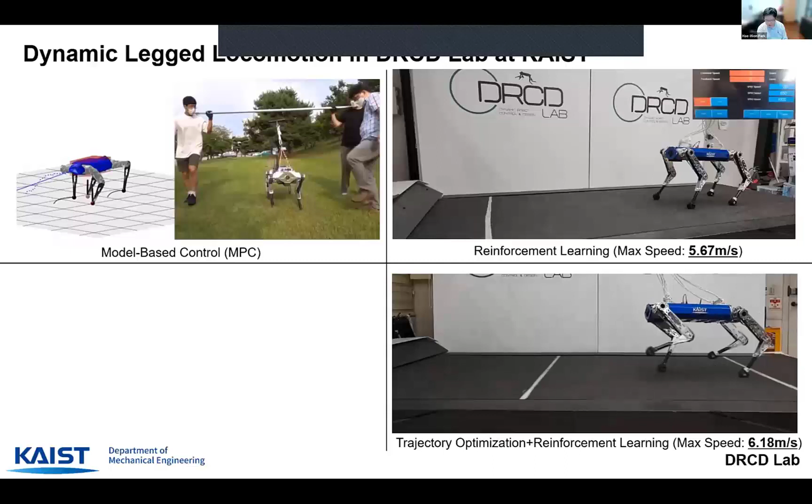In today's talk, I will mainly talk about control design for these two robots. The first one is KAIST HOUND - this is the same robot as you can see in the previous videos. On the right, we have MARVEL, an agile climbing legged robot.

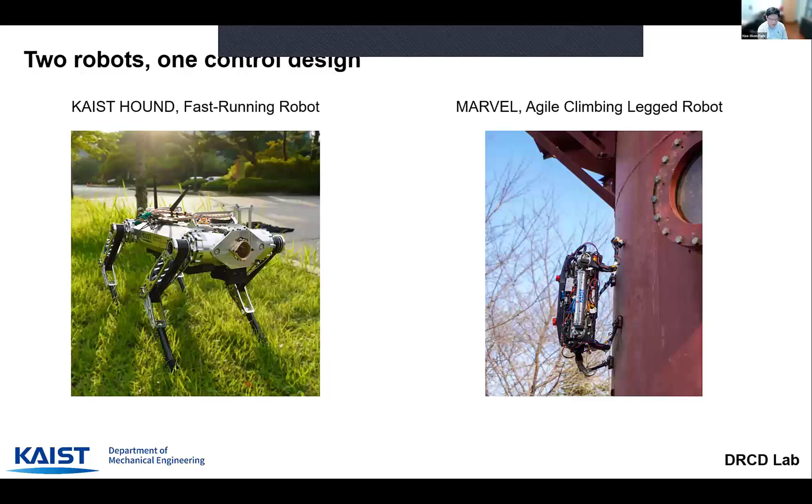KAIST HOUND is designed in-house, and it has a customized multi-module design. It is 45 kilograms heavy, and its leg length is 68 centimeters. So this is quite a large robot, about the same size as Boston Dynamics' Spot.

The second robot is MARVEL. This is actually a climbing robot, so it is only 8 kilograms heavy. It's actually designed by Yannan.

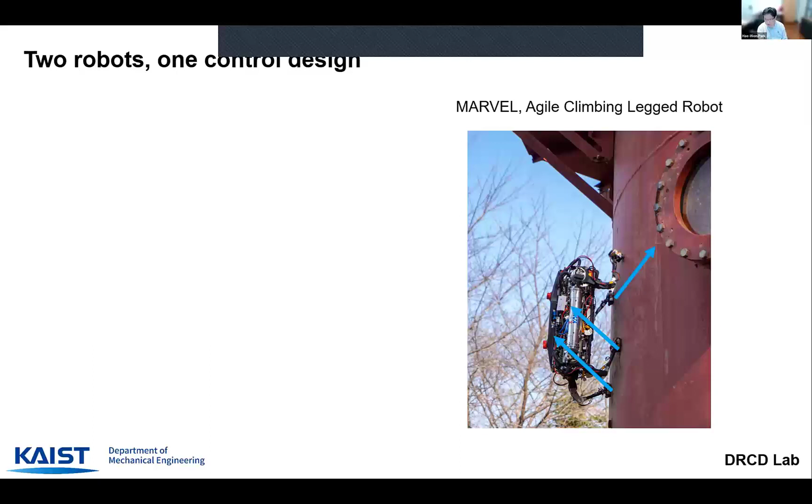In order to climb the vertical wall, it uses a magnetic foot. This magnetic foot can provide adhesion force to the ferromagnetic surface. It provides 530 Newtons in the normal direction, and in the shear direction it can provide 430 Newtons. This magnetic foot is designed by Yongwon and Jae-Jung Park, who are my students.

This magnetic foot utilizes the electropermanent magnet, and this electropermanent magnet can turn the magnetic force on and off like this. But unlike an electromagnet, it does not need any electrical energy to stay in the on state of the magnet - instead it requires electrical energy only when switching the on and off state. And the on and off switching occurs within 5 milliseconds, which is pretty fast.

So this magnetic foot is designed for fast locomotion on vertical walls and inverted walls. These two robots have different purposes - the KAIST HOUND is designed for running on the ground, while the MARVEL is designed for climbing vertical surfaces at very fast speed. But it shares the same simplified single rigid body dynamics model with different inertial parameters.

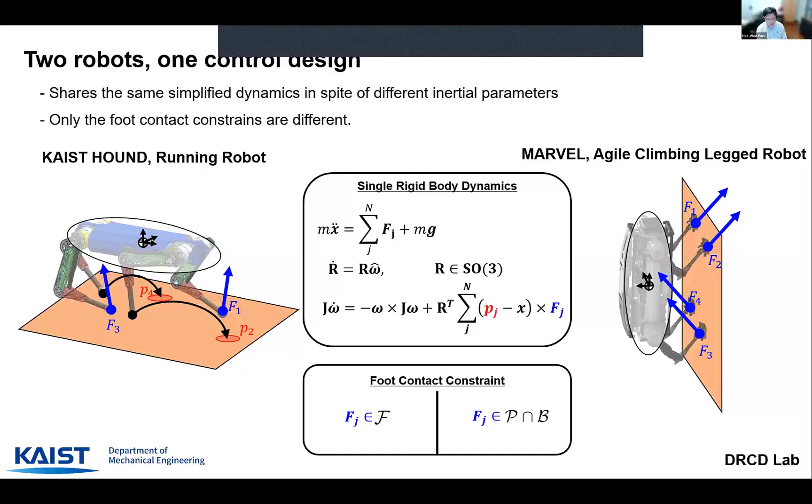The only change we should make is actually the foot contact constraint. So KAIST HOUND has to respect the friction cone foot contact constraint, while the MARVEL should respect some foot constraint imposed by the magnetic foot. Because these two robots share the same simplified model, probably the model predictive controller would be a good choice for designing the controller for these robots.

So in this single rigid body dynamics model, we have a rotation matrix, which is in the SO3 manifold. Normally this SO3 manifold is represented by Euler angles, and MPC is designed utilizing Euler angles. But as you know, this Euler angle representation has a significant issue when it comes to singular positions, and you can see that gimbal lock happens at singular positions.

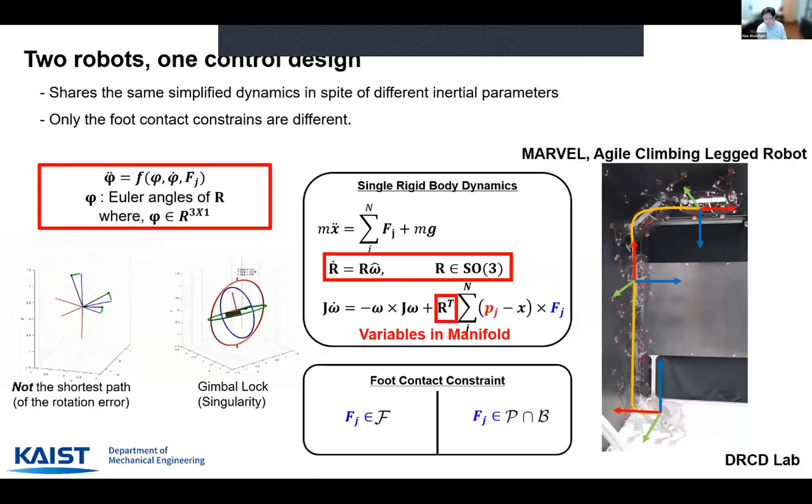In a normal quadruped robot, this would not be an issue, but this robot has to climb vertically and work on the ceiling in inverted configuration. So it can easily pass through singular configurations during locomotion, meaning we have to take the rotation matrix into account very carefully.

So we formulated our nonlinear MPC as an optimization problem on SO3. This is the error term, and this is the force constraint, where the state variables are as follows, including the rotation matrix.

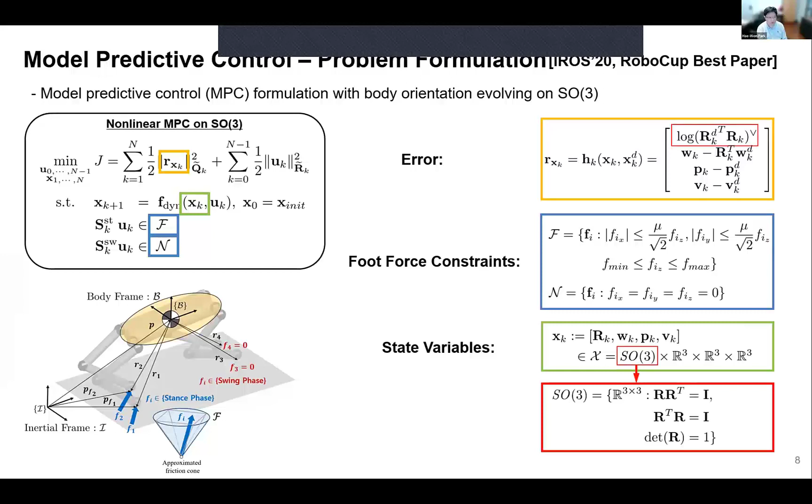This optimization problem is solved with an SQP solver, utilizing our own QP solver. And this is the whole control architecture.

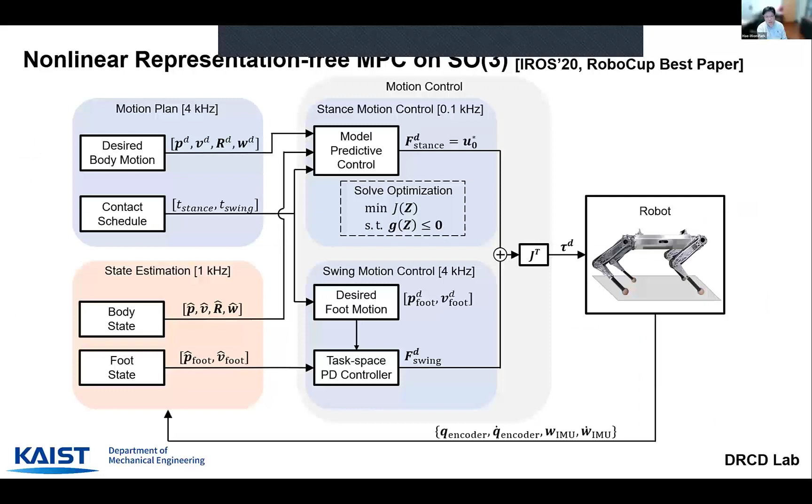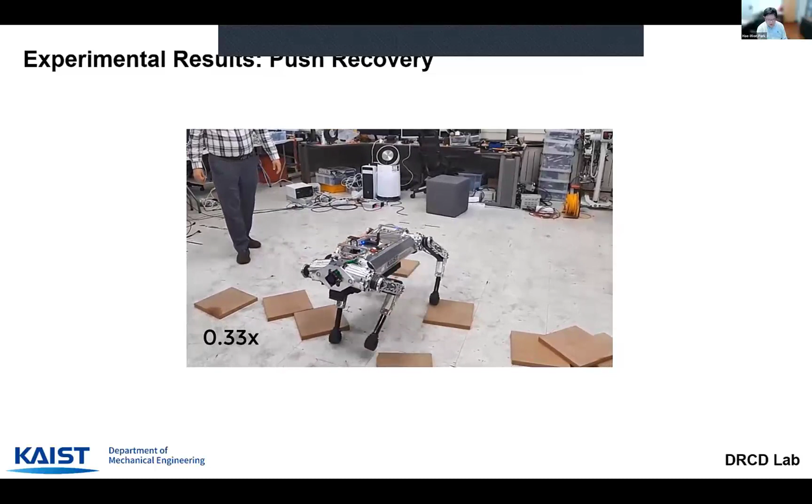If you see the robot recovering from the push, it actually can slide on the very slippery wooden block.

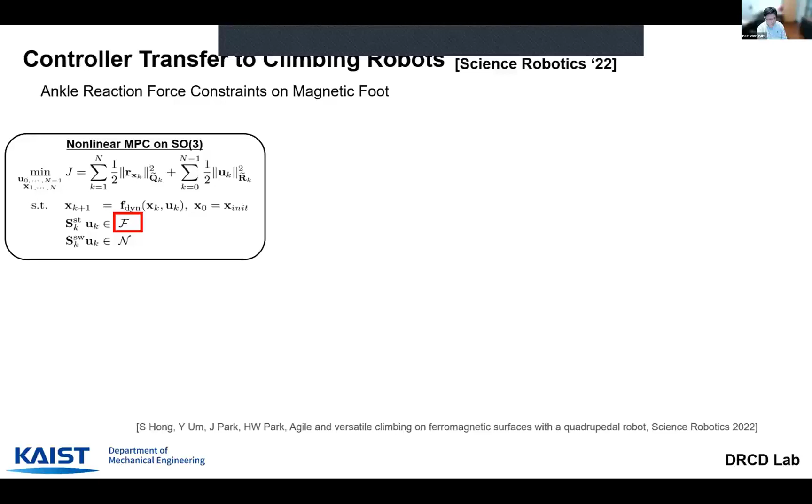Now that we've designed the MPC for the quadruped robot, we can transfer this to design a climbing robot controller. This can be done easily by changing only the foot contact constraint to account for the magnetic foot. So we have conditions for preventing sliding and preventing peel-off, and the foot contact constraint becomes the intersection of those two constraints.

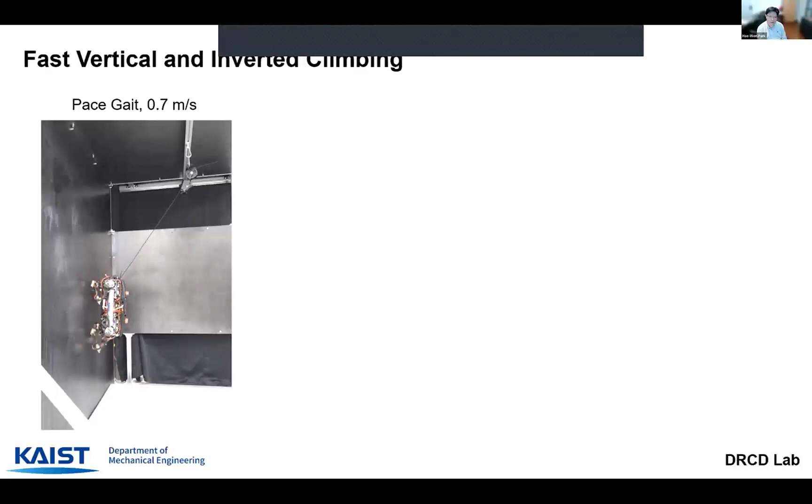This is the actual MPC experimental result. Here is a pacing gait with a speed of 0.7 meters per second, climbing a vertical wall. And this is an inverted trot gait on the ceiling at 0.5 meters per second.

This robot can carry a 2 kilogram payload vertically, and on the ceiling it can carry up to a 3 kilogram payload in inverted configuration.

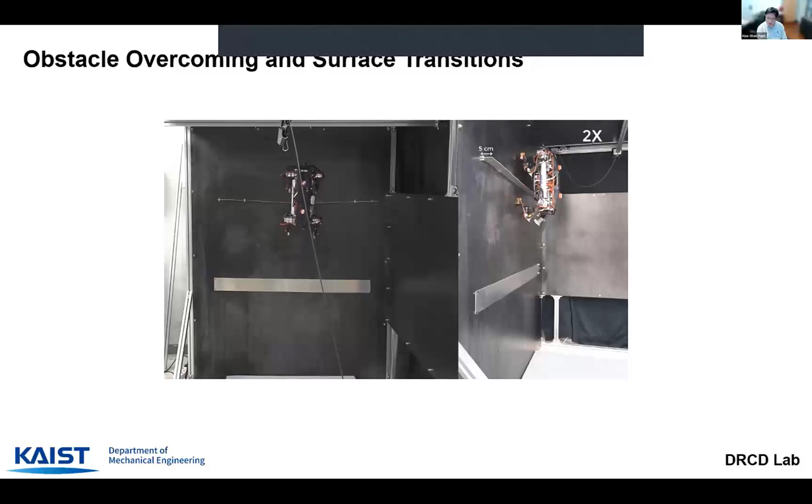Because this robot is a quadruped with many degrees of freedom, we can design trajectories that overcome obstacles. This video shows the robot overcoming a 10 centimeter gap and then a 5 centimeter high obstacle.

It can also switch and make a transition between different surfaces.

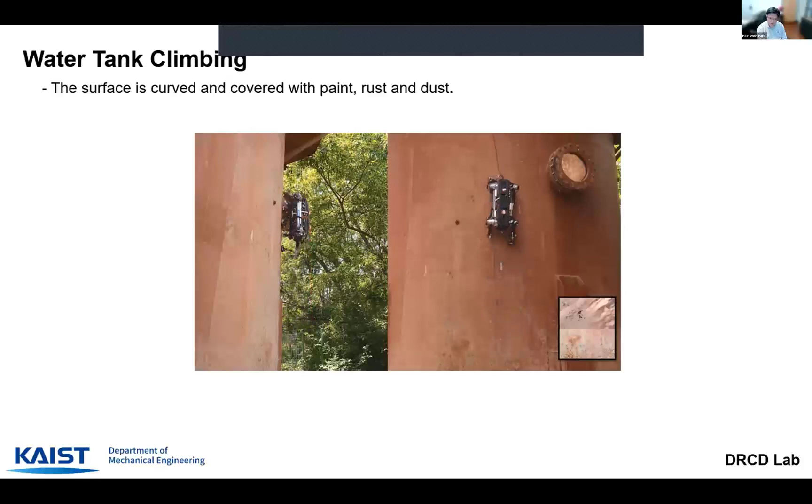We also did some outdoor experiments on a water tank. As you can see, even though the water tank is covered with rust and dust, the robot can climb up the vertical wall at quite a fast speed.

Even though we designed MPC controllers for these two robots, we experienced a very catastrophic failure during the treadmill fast run experiment. In this experiment, you can see that at high speed, the robot steps onto the side rail, which is not moving, and the robot stumbles over.

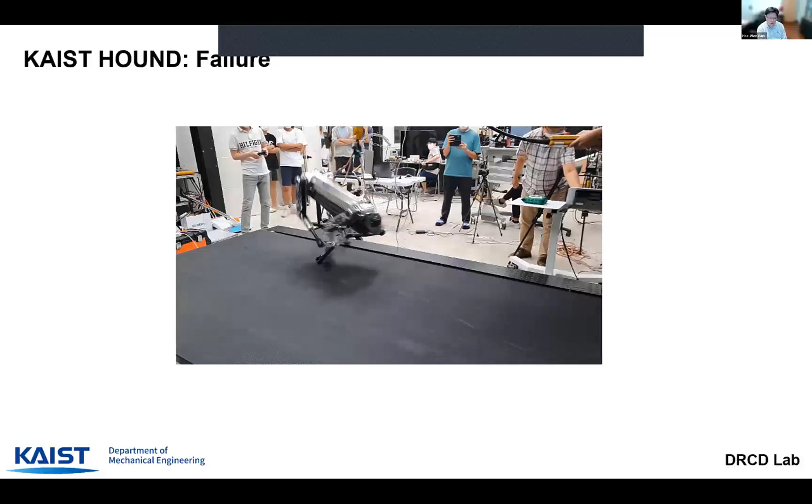In this situation, it's probably better to change the gait sequence. Since our MPC has only a fixed gait sequence, it doesn't have the ability to adapt to this kind of disturbance. So now I'll switch gears to talk about contact-implicit model predictive control, which can adapt gait sequences.

Here we have an optimization problem, which we solve using differential dynamic programming. Now I try to incorporate a contact model inside of this dynamic model.

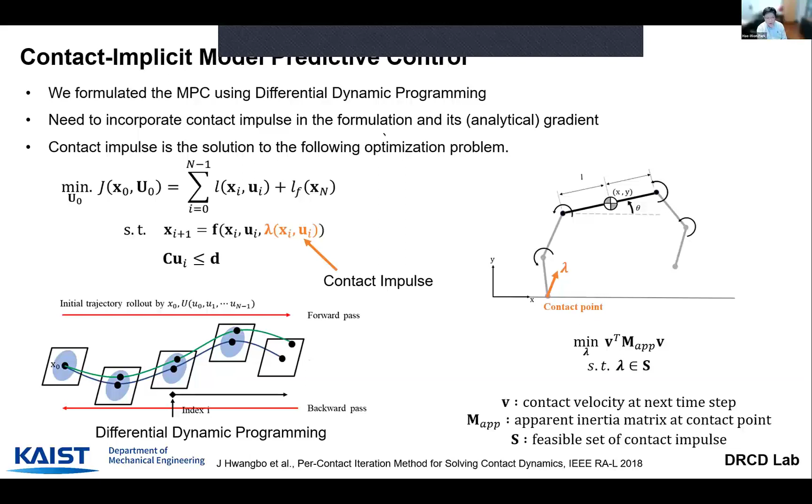This contact impulse will be a function of x and u, and it's the solution of this optimization problem, which has a constraint consisting of a linear complementarity constraint and a Coulomb friction constraint.

Because of this constraint, the solution can be categorized into three types: separating, clamping, and sliding. We can then obtain the analytical gradient of the contact impulse with respect to an arbitrary variable for each case.

But in the case of clamping, because we enforce the post-impact velocity to equal zero, the gradient of the post-impact velocity with respect to an arbitrary variable will always be zero. This can result in a local minimum.

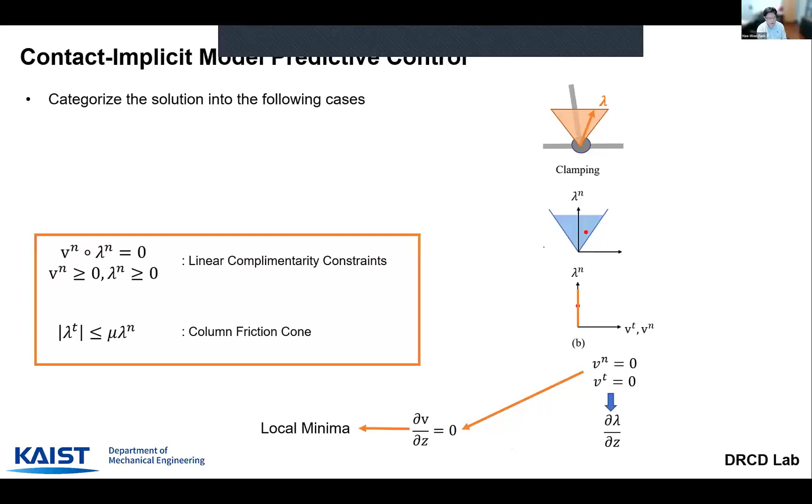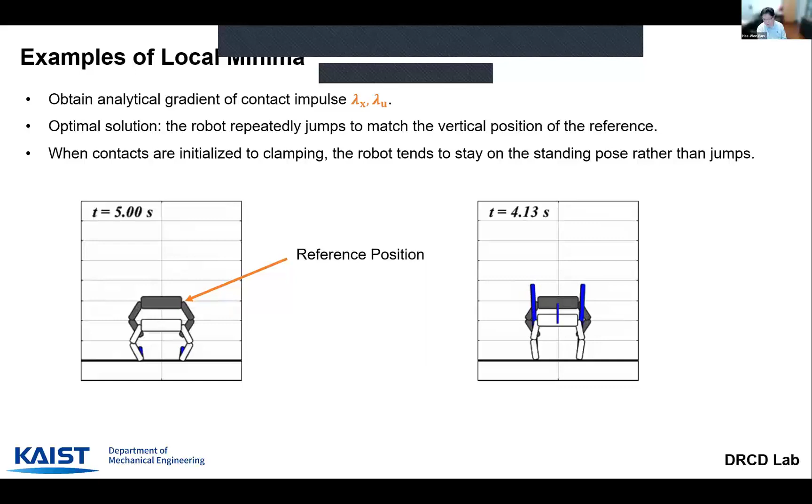So if you see this problem, you can see the reference position is higher than the robot. The optimal solution would be the robot should repeatedly jump to match the reference position, but the robot could not jump. So this could be some types of optimal solution, making the repeated jump.

So to remedy this issue, we replace the linear complementarity constraint with a smooth constraint, where this zero is replaced with some positive variable rho, which is said to be a very small value. As rho decreases, this smooth constraint will approximate the original constraint more closely. So this rho could be an adjusting parameter.

So if we use just the analytical gradient, you can see that the robot does not jump. This paper proposes some heuristic rule to calculate the analytical gradient, but you can see that this motion is kind of aperiodic. And then you have this repeated jumping motion utilizing our analytical gradient with smoothing.

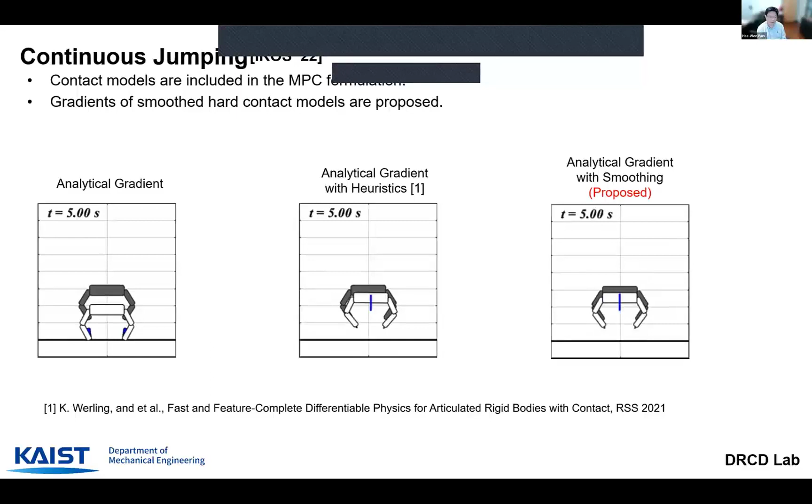So this shows some simulation results. This is a hopping robot, and this is the reference trajectory. As you can see, without any reference trajectory, with this simple reference trajectory, this MPC can discover the gait. And this is a planar robot, planar quadruped robot, and it can discover some gait.

And next is actually a very slippery slope. So you can see that the robot sometimes slides on the slippery surface to catch the reference trajectory.

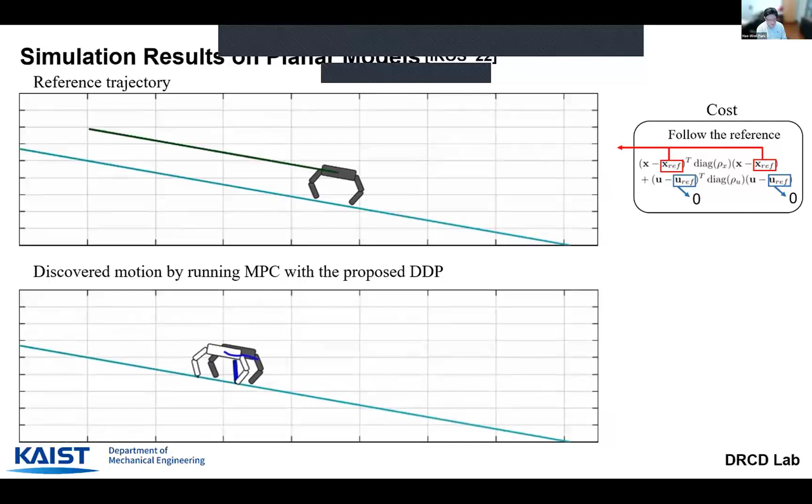And this is we can actually make the MPC prefer a bounding gait. So you can see that it actually discovers automatically the bounding gait if we have a preference on the gait. And this continuous flipping is also possible.

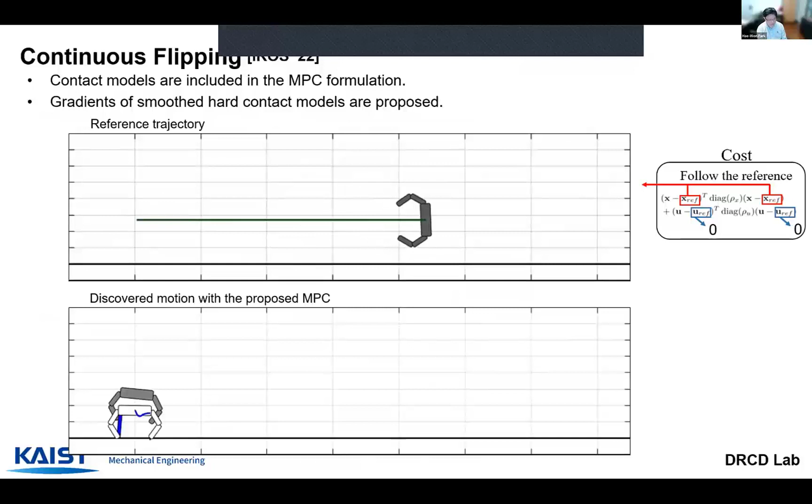And you can see that we actually look at the effect of the smoothing variable rho. So if rho is too small, you can see that it's actually very close to the original constraint. It does not jump. When we increase rho, then we will have a jump, but it has a very long stance time. If we have a proper rho, then it can have some repeated jump.

And then you can see that the cost is lowest at this point. And then if rho is too high, then it does not make a jump again. So we can see that there is some sweet spot for the value of rho. So this rho is actually an adjusting parameter for our MPC.

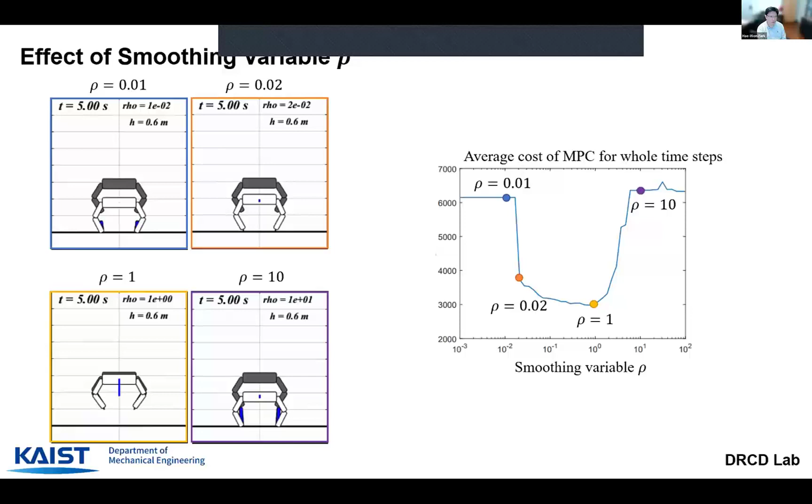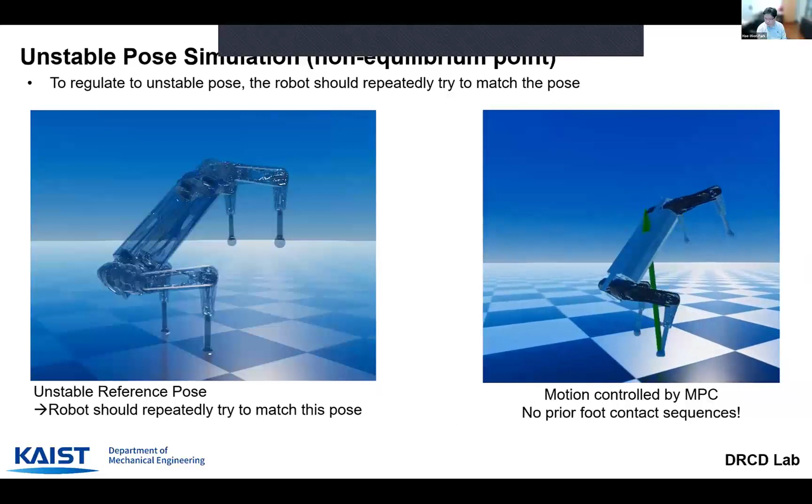And this is an unstable reference pose. So of course the robot cannot stay in this reference pose, because it's actually not an equilibrium point of the robot, but the robot tries to match that unstable reference pose. When it fails, it automatically kicks the ground to match the reference pose, as you can see here.

And then we have a gait preference for trotting, and the MPC DT is 0.025 second, and the sampling time is 0.025 second, and the number of horizon steps is 20.

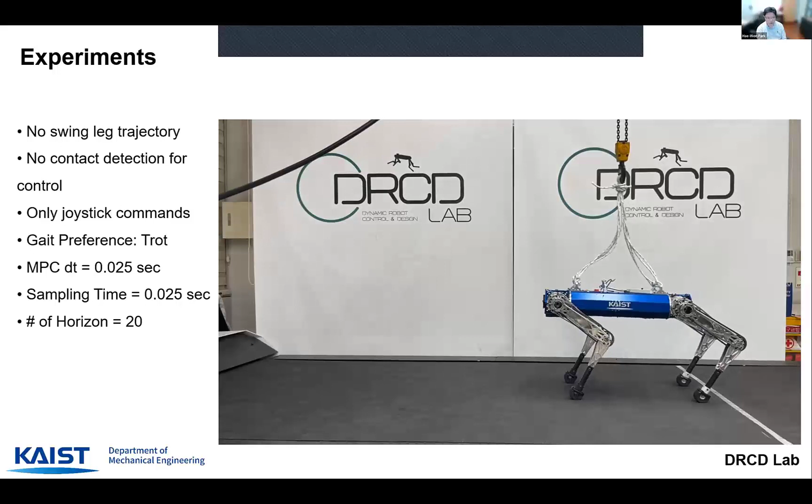So as the experimenter gives a joystick command, it started working, and it's increasing the speed. So this is actually a very preliminary result.

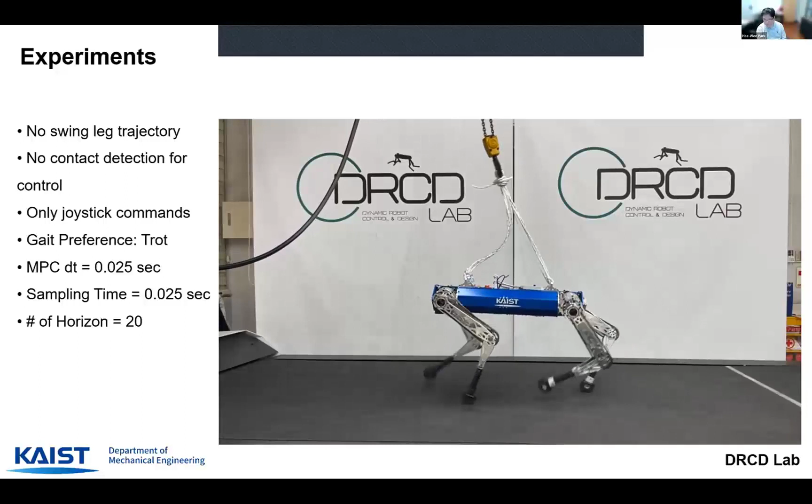As you can see, the robot sometimes skips the gait because we did not enforce the gait, we only provided a preference for the trotting gait. And as you can see, the MPC solves within the sampling time most of the time.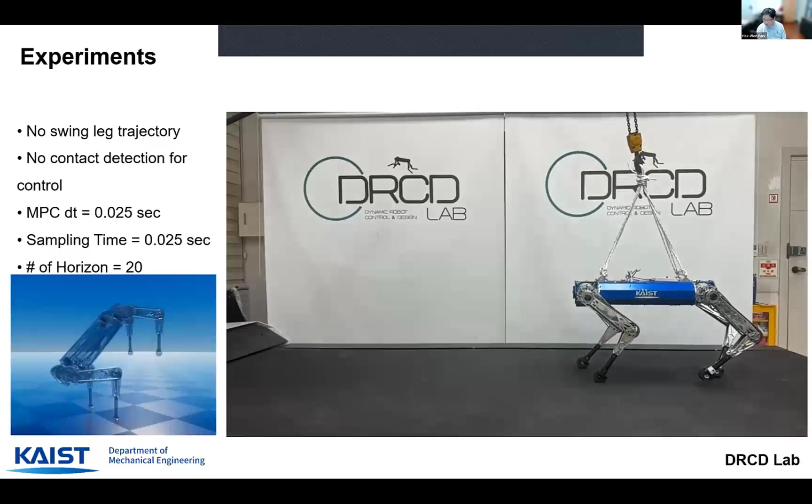So this is actually a very preliminary result. We are actually trying to improve the controller performance more.

So in conclusion, we used the model predictive controller to design a controller for two different robots. The first one is the running quadruped robot, KAIST HOUND, and the next one is the agile climbing robot, KAIST MARVEL. So MPC was flexible enough to control different robots with very similar modification.

But because MPC has some planned sequence, and it doesn't have the ability to adjust the gait sequences in our MPC, it needed some improvement, and we are trying to make this contact implicit MPC more robust.

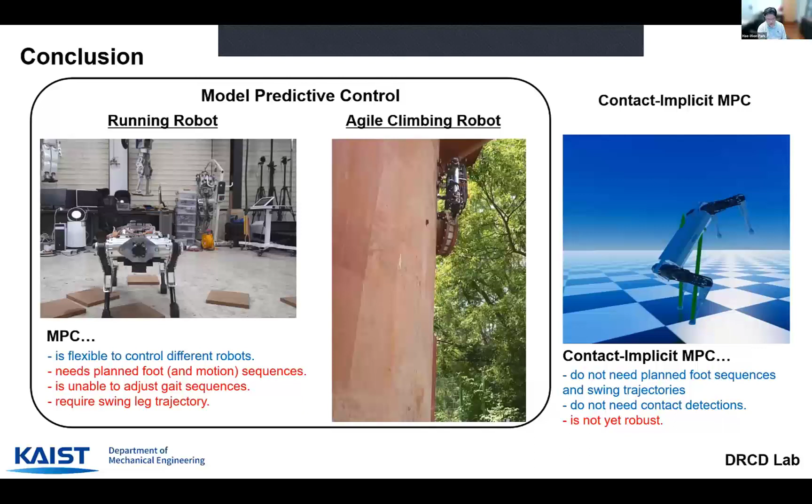And then this contact implicit MPC can discover automatically some interesting gaits in our robot, but it needs more experimental verification, and it needs to be more robust to be implemented in a real robot. So this is the end of my talk, and thank you for your attention.

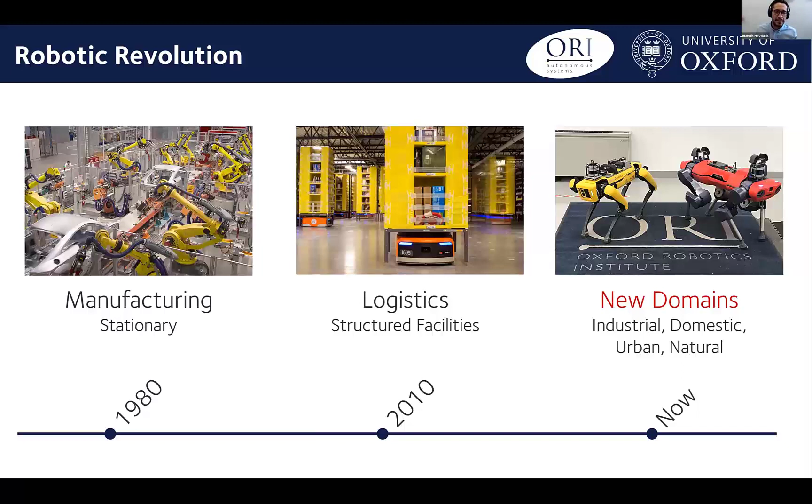With current robotics development, nowadays we require highly mobile robots that are much more versatile—not the one-purpose-built robots that operate in automated warehouses or logistics facilities. We need a lot more in terms of capabilities in order for them to be successfully deployed. In building up these capabilities, my group and myself have been working in the past decade or so into three main components.

These are the three main components of our research: combining optimal control with machine learning and motion and path planning approaches. We tend to work in these areas, and we're looking into how we can combine this into different levels of behavior and motion generation, to make robots with arms and legs truly useful.

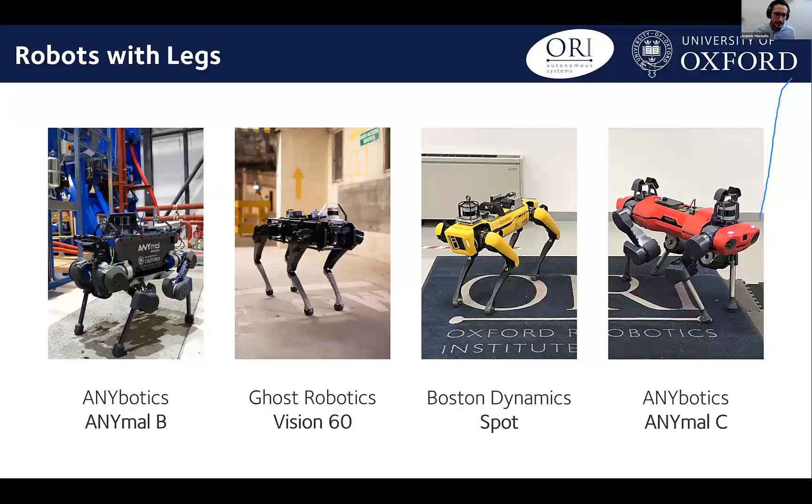These are the robots that we've been mostly working with. All of them are quadrupeds, most of them the size of a medium-sized dog—you can think of it as a golden retriever type of robot. We've been looking at these robots for their capability to maneuver and travel through spaces that are very hard to navigate, really for complex and unstructured and challenging environments like manufacturing floors, mining tunnels, nuclear power plants, and so on.

The challenges we face in these environments is that we have a lot of different surfaces to locomote on—concrete, gravel, bits of a facility that are generally very slippery, other bits that might have gravel or sand and so on. These are challenging aspects of locomotion, and of course they present very strict requirements for a very high degree of mobility and flexibility.

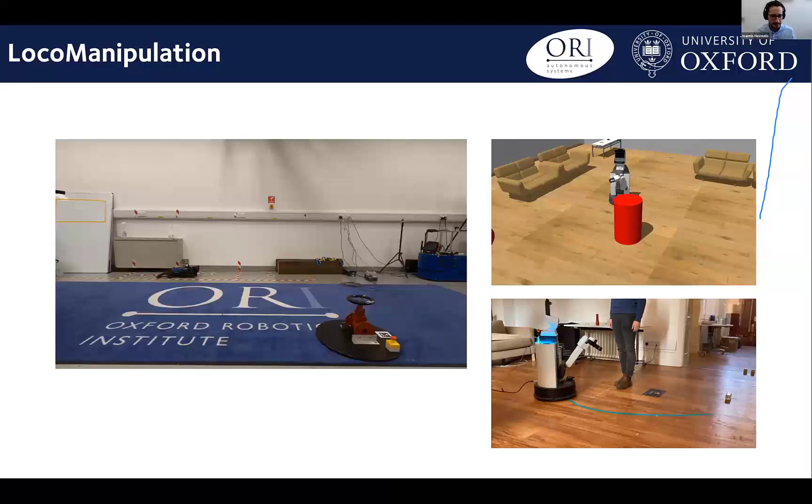Lately, we've been looking a lot at how we can combine manipulation capabilities with robotic platforms. In that respect, we've been looking at how we can have these robots autonomously interact with valves, push buttons, operate control boxes, gates, and so on. These are also skills that can easily transfer into different environments—from an industrial environment to a service environment or even a domestic environment.

This is work we are doing in parallel with the HSR robot, a mobile wheel-based manipulator, for the RoboCup at Home competition that we take part in. The main idea here is that for all robots to be truly useful in such environments, they need to be good at three main capabilities: mobility, interaction, and autonomy.

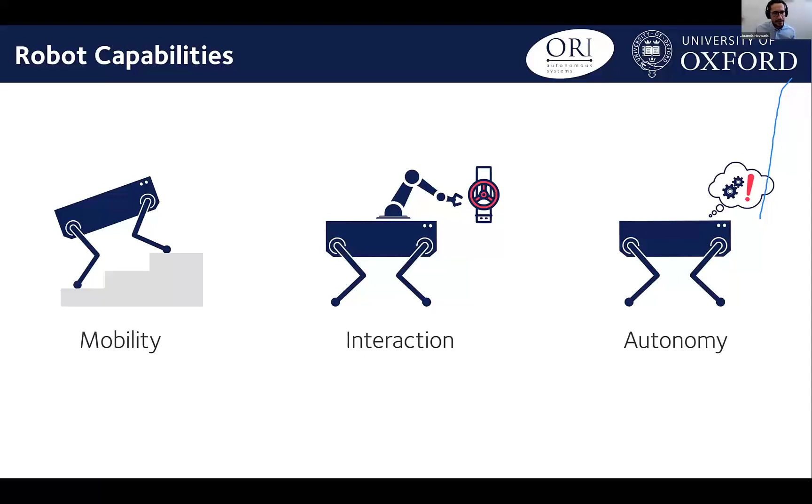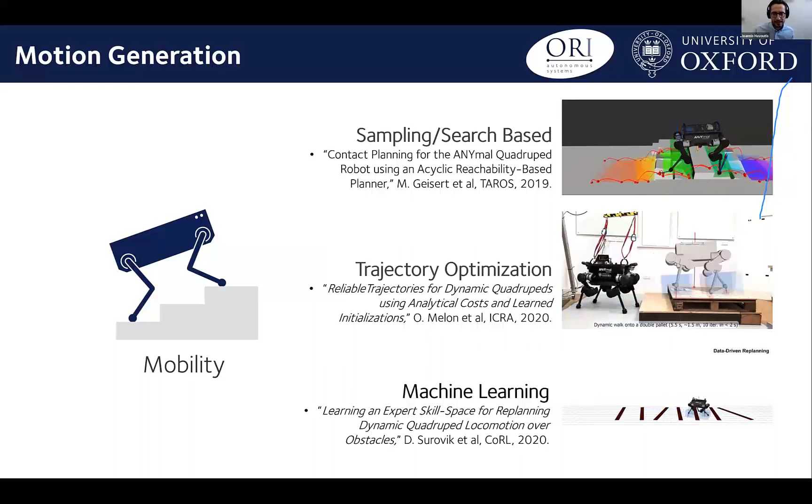On mobility, we've been working on leg locomotion for quite a few years now, and we have developed a plethora of approaches that span the full range from sampling-based or search-based approaches to trajectory optimization and machine learning. Nowadays, most of our effort is either combining optimization with machine learning or working into more pure machine learning approaches for locomotion. These are the two approaches I'm going to focus on mostly today.

I'll start with a framework that we developed over the course of a couple of years now, called RECALL. RECALL stands for Receding Horizon Experience Control Adaptive Leg Locomotion.

To give you the bird's eye view of the framework, you have the robots on the right. You have a planner that is a non-linear optimizer in a receding horizon manner. You have a couple of initialization choices for how you initialize the optimization. One of them is a heuristic-based one, and the other is a neural network one that I'll talk about in more detail in the following slides.

You have an input that would be either a joystick input, so input from a user, or from a higher level planner that would command the robot where it needs to be. Then you have sensors that would give you things like height maps or vision estimates and so on. At the end of this pipeline, you have a whole body controller that in most cases should be a model-based approach to producing the required torques for moving the limbs of the robot.

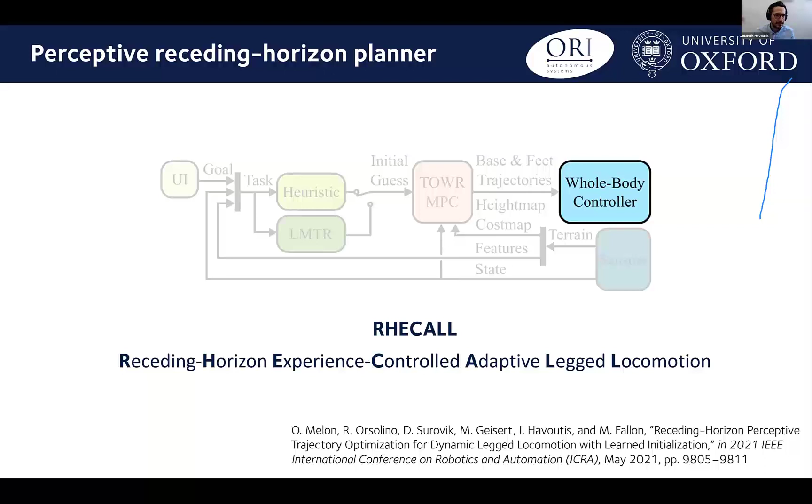In that framework, we start from a well-known optimization framework that has been developed in the past by colleagues at ETH, as a trajectory optimization problem. We work with a direct collocation formulation, and we utilize a single rigid body dynamics model for that optimization.

It's very straightforward, done with polynomials and splines, and then you can use an optimizer like an interior point method solver to control how the splines, the control points of the splines, behave, and then you arrive at trajectories for your robot to follow.

Starting from the original TOWR framework, what we quickly discovered is that the solutions this produced were not in a range that our quadruped could reliably execute.

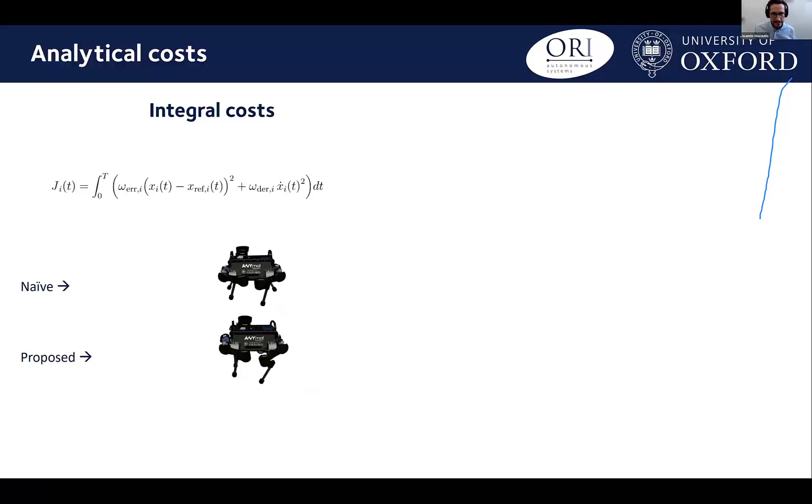So we started adding costs. One of those was an integral cost for the base, so we penalized how much the base would swing and bob laterally and in the pitching motion.

We added terrain costs to help reach the surfaces where you have desired footholds, and to avoid edges and so on.

And we added more costs on kinematic constraints. For example, instead of using simple box constraints for where the feet of the quadruped can lie, we used superquadrics that have this ellipsoid shape, which help us target better where we want the legs to be.

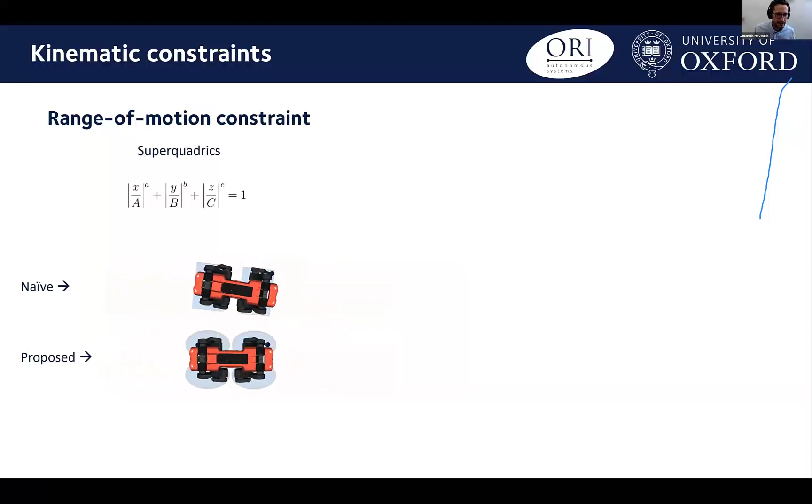We've also utilized a simplification of the terrain cost, an approximation of a running terrain cost that avoids abrupt changes in the cost function, which all resulted in an approach that can easily navigate over relatively complex environments.

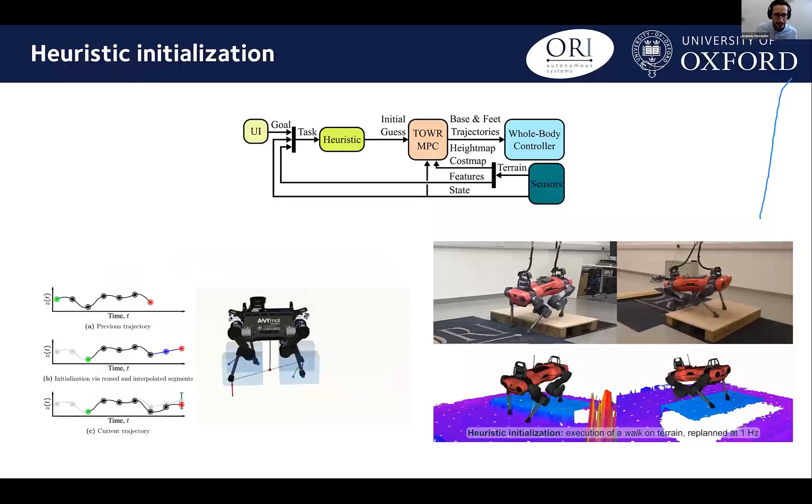And that we can then look at how we can make it into a receding horizon formulation. By adding all these cost terms, though, we've increased the computation time it would take to solve the optimization.

So what we started considering was how we can learn part of this equation, in essence to have an approximate model of the analytic solution, and then use that when we run the system online.

I've seen in the audience a couple of people that were part of the MEMMO project. This is kind of how you can use memory of past experience in order to speed up your current solutions, how you access current solutions, or how you optimize faster.

We first started with learning a dynamic stability criterion. The idea here was that we can calculate these analytic stability margins based on how the terrain looks and how the configuration is at this point. The problem is that we couldn't really perform this calculation online.

So instead of trying to do the calculation online, we've collected a bunch of data and learned an approximation of this margin, and then used that to produce estimates of it online.

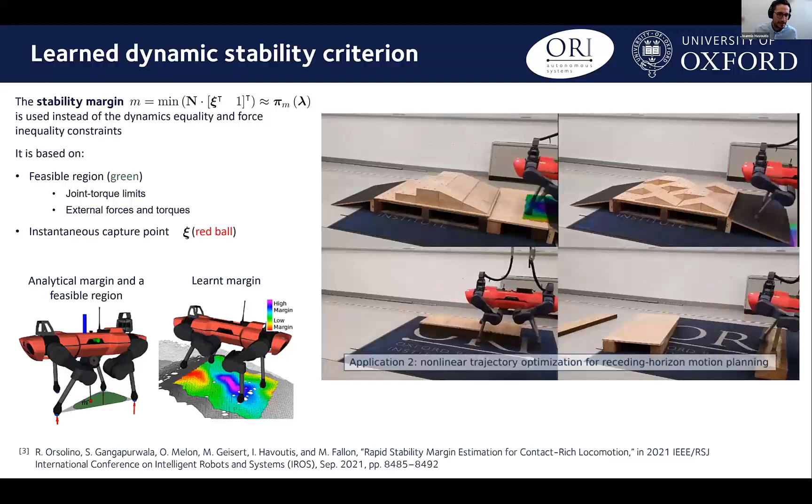And here we can see how this is overlaid over the terrain that the quadruped is working on, and how it changes with respect to how the morphology looks.

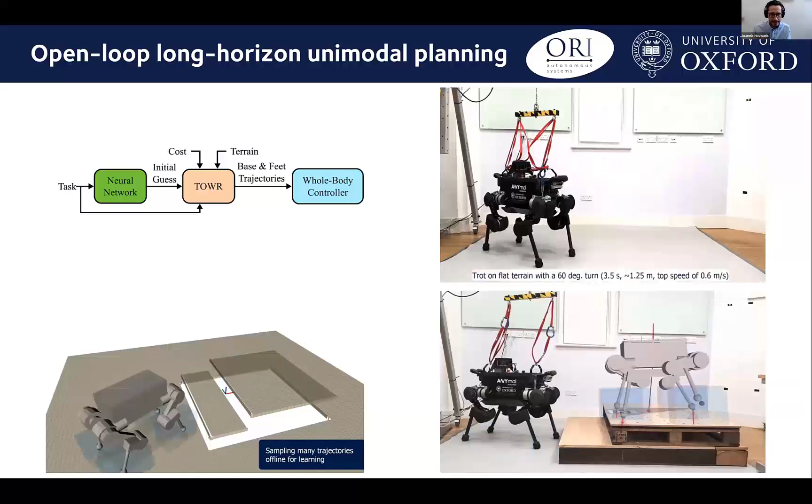The next major bit that we looked at is how we can create more efficient initializations. The key observation was that when you initialize your nonlinear optimizer with a naive approach, your solutions would vary quite a lot, with many being solutions that the quadruped could not realize with the real hardware. So we started collecting data in simulation of trajectories that are good, low-cost solutions, and wanted to create a library we could quickly query to get good initializations.

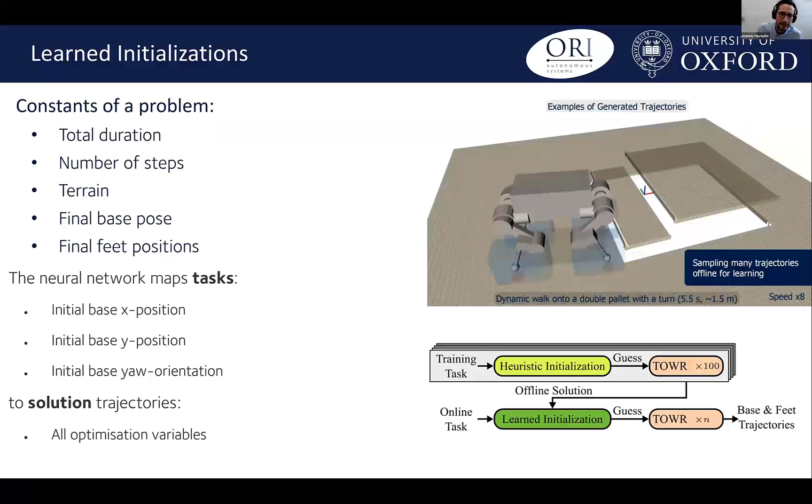The learned initializations provide the full solution to a trajectory. Most of the time this would give you a good trajectory to start with, that would have some details along the way that would need to be ironed out by the nonlinear optimizer. Some of the samples from the network doing this approximation could run on the system as is, but in most cases they would have some point where they would not work that great. So we would pass them to the optimizer as a good initialization, and see at the end the difference between what we predict and what the optimizer gives out.

The problem with this is that this was a unimodal approximation. So we would start from a grid where we could sample trajectories, and then learn how a good, low-cost trajectory looks versus a trajectory with higher cost. Then the system would approximate good trajectories in that cost sense.

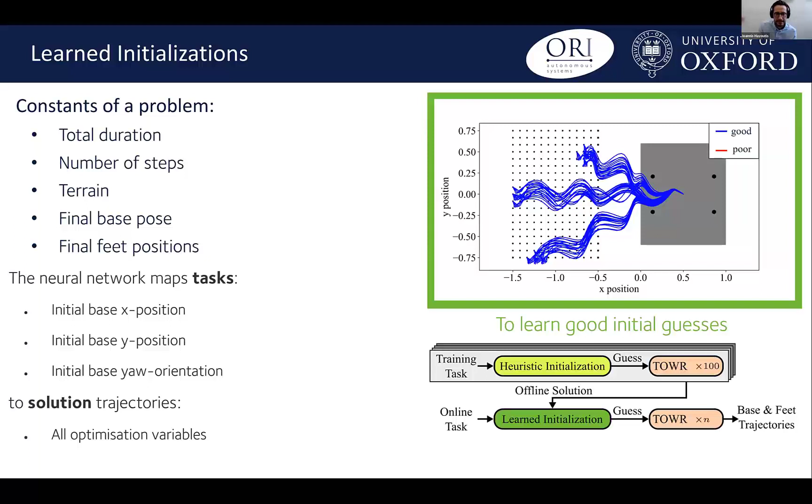We could even iterate that in order to make sure the system does not produce poor initial guesses. And since this is something we could run offline, we could iterate a couple of times until the system converges.

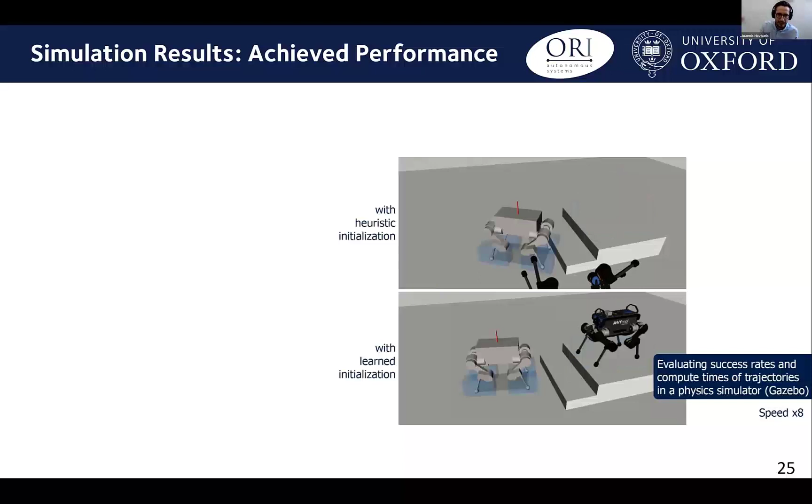What we're able to show in this case is that with the heuristic initialization we would get a lot of failure examples, but with the learned initialization we have a lot less failure, and also whole body trajectories that have much less cost and are better realized by the real world hardware. You can see that here in these results, and we can also show how this increases or decreases relative to how many iterations we allow the optimizer to run.

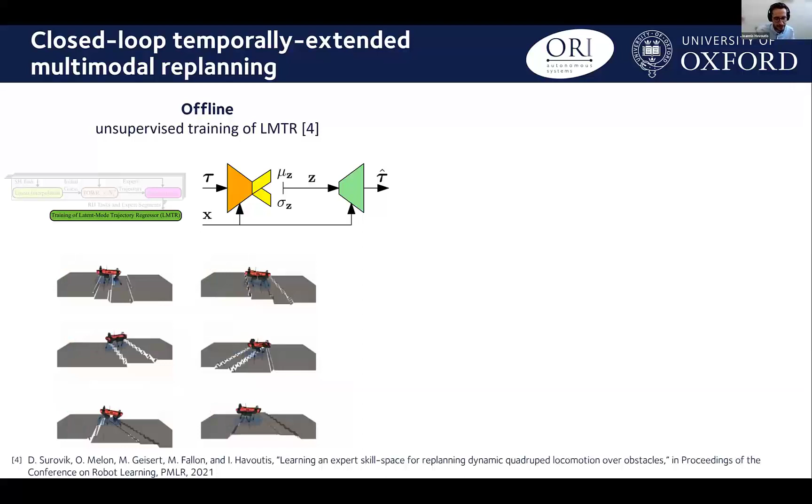Taking this one step further, we've worked on how to provide initializations for the receding horizon formulation. So as the MPC loop is unrolling, we can have a system that is not unimodal anymore, but a multimodal neural network that generates trajectories as initializations for the optimizer.

Here on the left, you can see the data we've used to offline train that multimodal system. And on the right, you can see how we can use this online to, in essence, warm start optimizations.

Of course, the main benefit of warm started optimization is that at the end you can get a lot better solutions with a lot less iterations. This means you can run your optimizer in a loop that is a lot faster, and achieve a higher frequency solver.

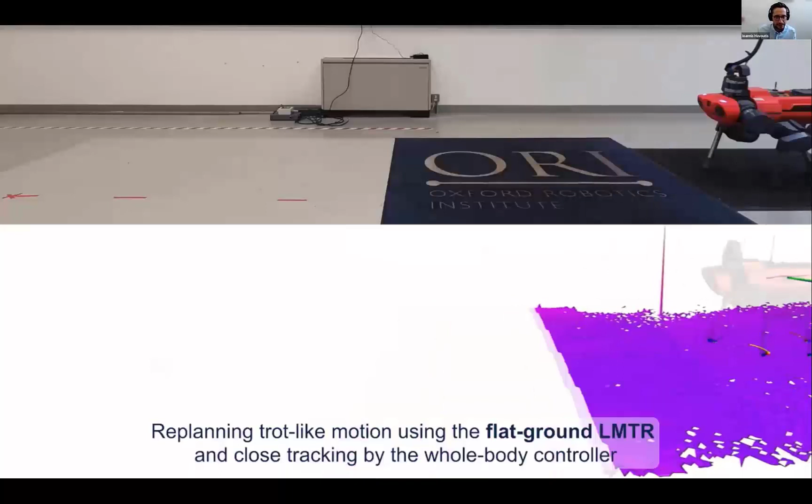These are examples of how this looks with a real system, and how the cost landscape looks, and how the reference trajectories fit and so on. And this is another example with a little step for the quadruped and so on.

Now I'm going to talk a little bit about the work that we did on learning-based locomotion.

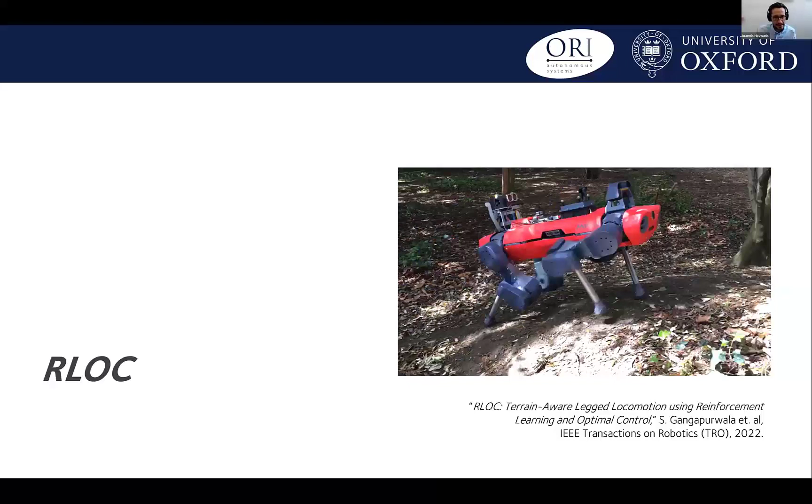This is work we've been doing in parallel, and it's a straightforward application of a reinforcement learning setup. We ask the robots to follow an input that is a velocity input, a linear velocity for the base and a yaw rate for the base. So this is just a joystick that commands where the robot needs to go, and we would like to train a control policy able to orchestrate all the degrees of freedom of the robot in order to follow this control input as closely as possible.

We drew a couple of parallels with the optimization-based framework, in the sense that here we also introduced a key set of constraints that serve to guide the optimization. This is work we did back in 2022, and you can find more information in the paper I'm pointing at here.

One of the key benefits of the system was that we were able to bootstrap, in essence, from examples from an optimization-based framework, and then have a controller that we can refine using the RL framework. This means we arrive at a learning-based controller that starts from a good solution to the problem, and it can do as good a job as the controller we started from, while achieving the same robustness and flexibility with even less torque required on average to run.

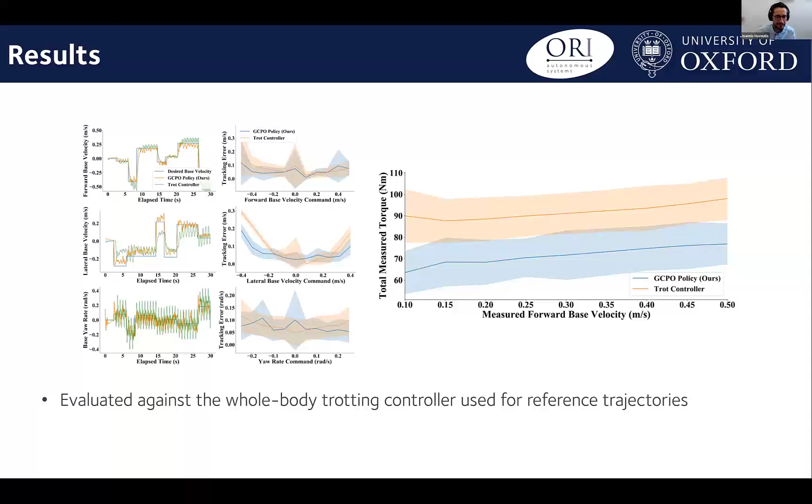What's more, we've looked at how we can transfer this to the real robot. We're looking to characterize the behavior of the system in a way that guarantees it would perform as predicted. Of course, in reality we cannot give hard guarantees in the analytical control sense, but what we've looked at here are statistical guarantees, looking at how many constraint violations we had in simulation, and estimating how many constraint violations, for example joint acceleration violations, we'd see when running this on the real system. By making this closely match, we're confident this would be as performant on real hardware as in simulation, where we can run a lot more examples and get a lot more statistics.

So this is how this looks on the real system. You can have a really naturally responsive system that is also very compliant. It generalizes well in environments well beyond what it has trained on, and all the training has been done in simulation, I need to stress that.

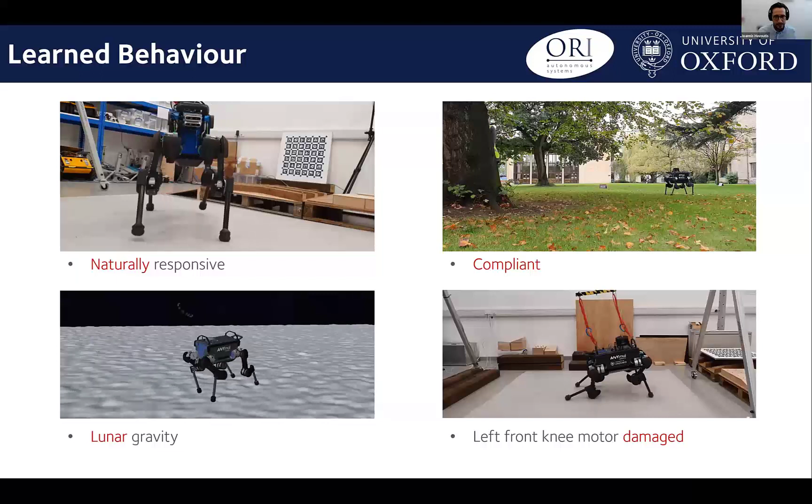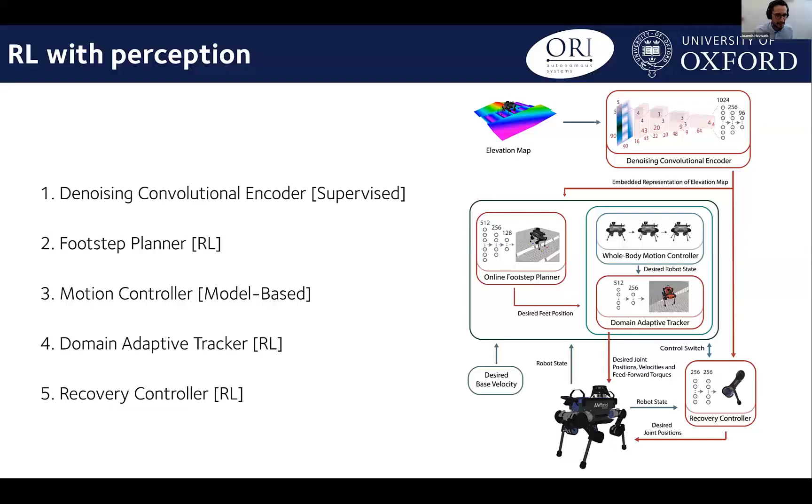The next step in that work was to add perception, and this is a more extensive framework. This is not a single policy commanding what the robot is doing, but we have a couple more neural networks at play here. I don't have much time to go into detail, but I want to point out that all training was done in simulation. The key benefit here, in contrast with the more traditional control-based approaches like MPC that we've been developing, is that we cannot very easily add perception information to those frameworks.

So in this case, we've added training in a procedurally generated environment, examples of which you can see at the top right, and this also contains perception information that goes into the system. So the system now makes exact decisions about where it wants to place its next foothold.

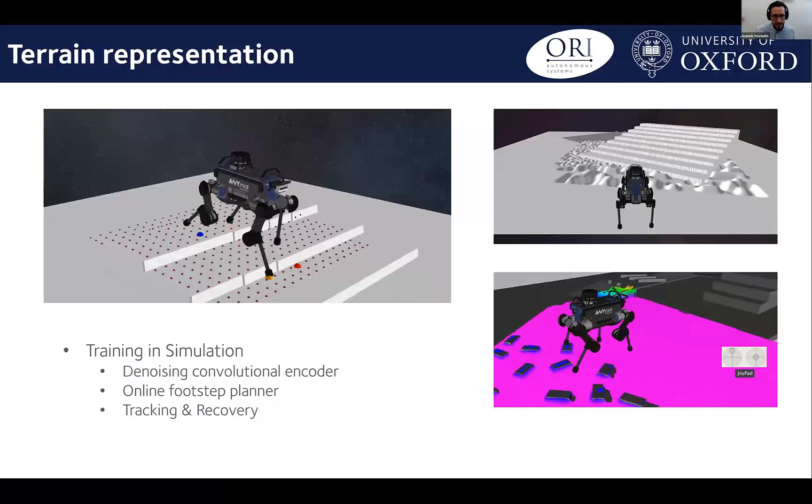And of course this works quite well on the real hardware as well. You can see some examples of the system going over some of the mobility benchmarks we've used earlier in the lab. You can also see, on the bottom right, that this is a really reactive controller, so it can take a lot of hard pushing and remain very stable.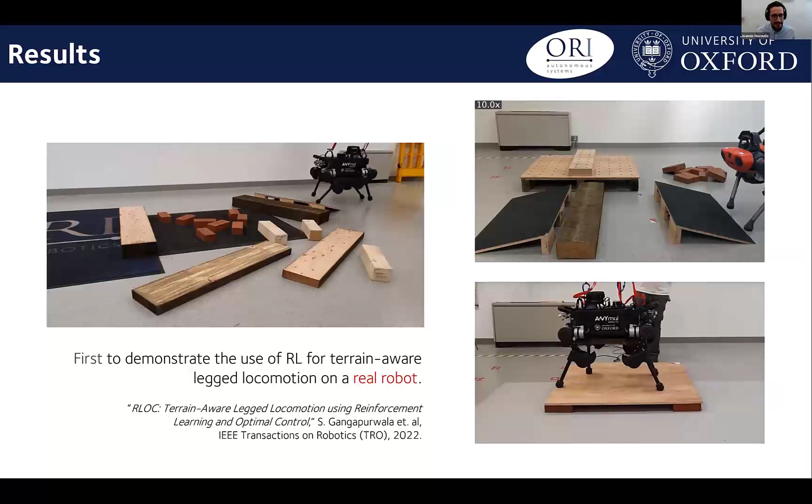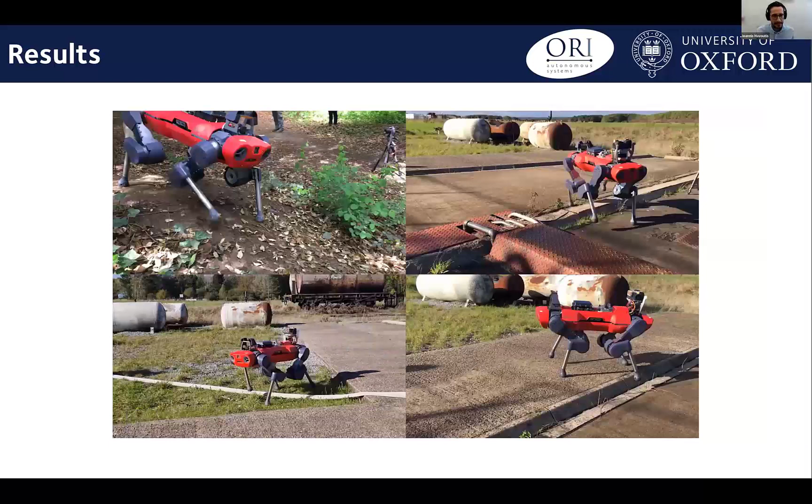And of course, this would generalize well beyond the lab environments. One other aspect of that work to stress is that all of the training was done with a different quadruped. All of the training of this controller was done on the previous version of the ANYmal quadruped, while we were able to deploy robustly and successfully with a bigger robot, something that is very hard to achieve with non-learning based or non-learning supported approaches.

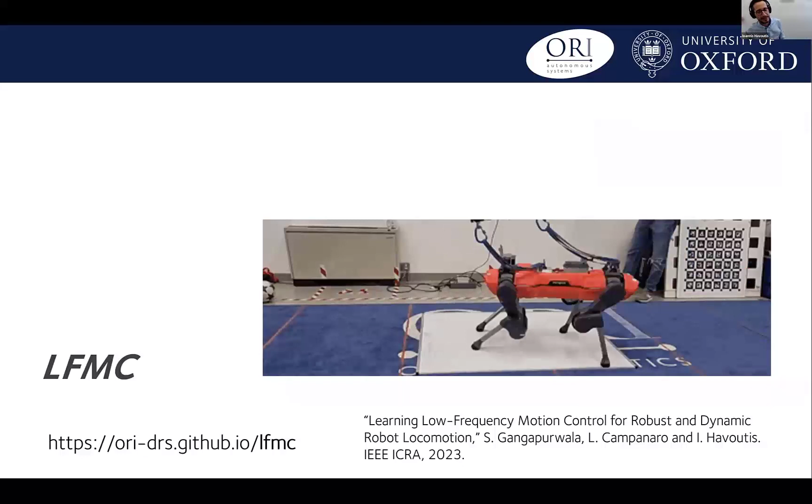Given that I'm running out of time, I'll skip that bit since it doesn't add that much to the discussion, and I'll directly go to the third and last topic I want to cover here. This is our latest work that we'll present at ICRA, and I want to use it to kick off a broader discussion in the community.

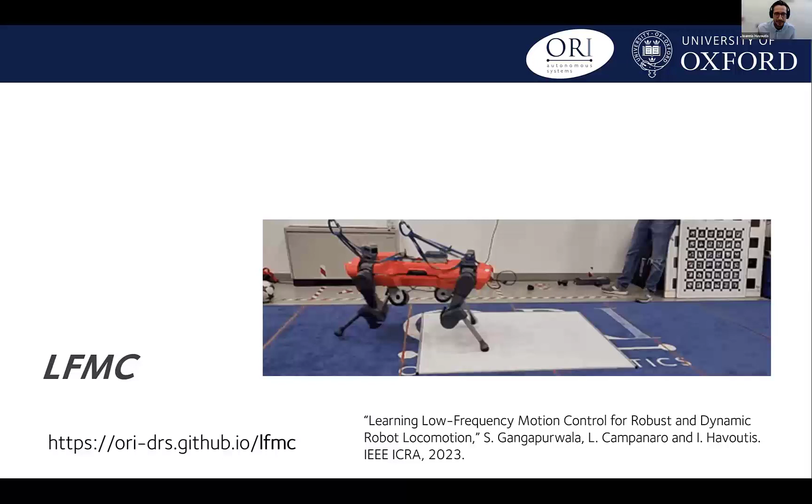So here's one problem: you have a very slippery surface. This is a whiteboard that we've sprayed with water and soap. We have the robot walk on that, and we want it to be balanced and robust over different levels of slipperiness.

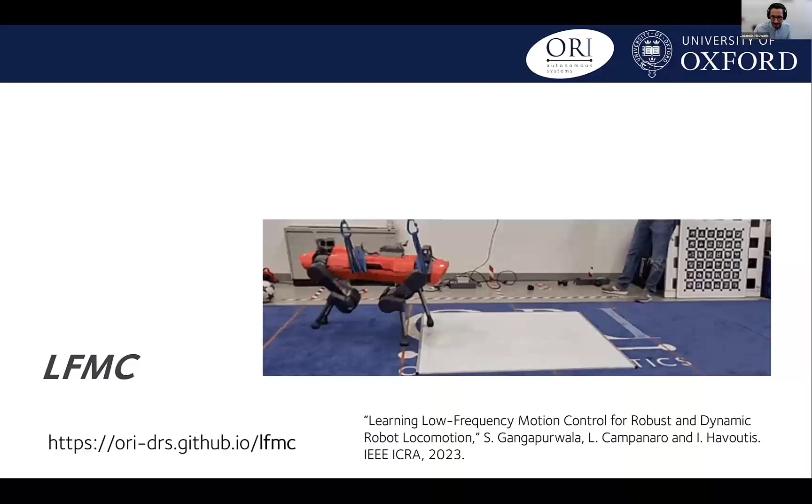So when we're faced with these problems, especially coming from a control background, intuitively we think about how we can maximize robustness and reactivity by increasing the motor control frequency, right?

So the example is here, right? Mammalian quadrupeds are very agile, very robust, and their behavior is really reactive. But if you look into the hardware, you see that they have really high sensory motor delays, and of course high sensory motor noise as well.

If you look through the literature, a dog at the size of the quadrupeds that we have, about 40 kilos or so, suffers from actuation delays estimated to be about 60 milliseconds or so, which breaks down into sensor delays, afferent nerve conduction delays, synaptic delays, and so on, down to force generation delays.

So the question here is how these systems are able to cope with all that noise and delay and still be that performant and that robust. We wanted to see whether we can reproduce that, or maybe get a slight peek into whether this can be an inspiration for quadrupedal locomotion with the hardware we currently have.

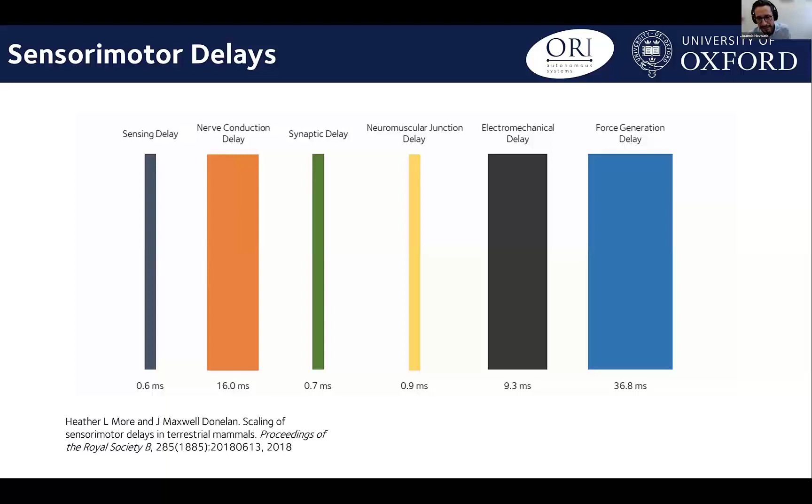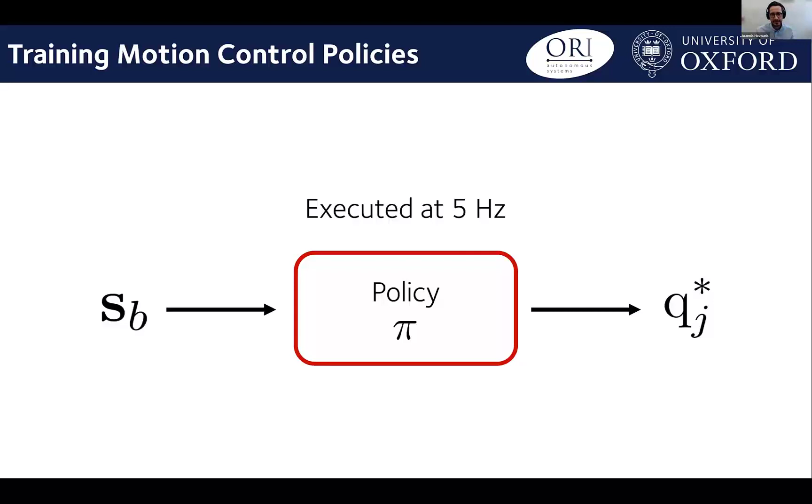So we started looking at policies that run at much lower control frequencies. All the work I've shown you so far is executed at about 200 hertz, give or take. Now we were looking at whether dropping that as low as 5 hertz would still result in locomotion behaviors that made sense.

Of course, what we used for this work was again a learning-based controller, with a system that isn't even deep — it's a really simple neural network that we train with observations that are very simple, like base orientation, angular and linear velocities, joint positions and velocities, the desired joint positions from the previous tick, and then the user input, like the joystick command we use with all the other controllers.

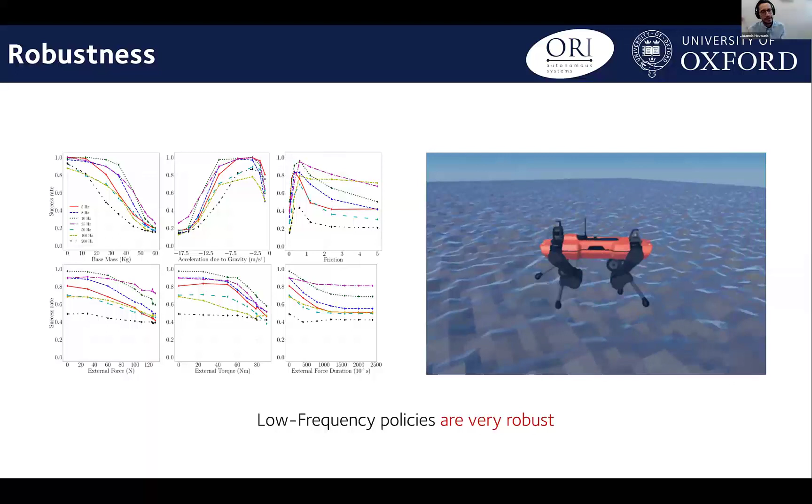What we discovered is that with a really low frequency policy, we can have really robust behaviors — robust even when we change the base mass, play around with gravity or friction, or apply external forces and torques while running these controllers.

In essence, we set up a simulation benchmark and see how these systems perform with policies on which we do dynamic randomization or not. Dynamic randomization is one of the general ways of doing sim-to-real transfer, making sure your policy transfers to hardware by randomizing all sorts of dynamics parameters in the training environment.

We also see that these lower frequency motor controllers are less sensitive to actuation dynamics when we change those dynamics in deployment. And when we introduce artificial latency in the actuation dynamics, we see that the lower the frequency of control, the higher the robustness — up to some extent, of course.

In our study, we also see that these low-frequency policies train at least as fast as the higher frequency policies, and a lot faster than the very high frequency policies.

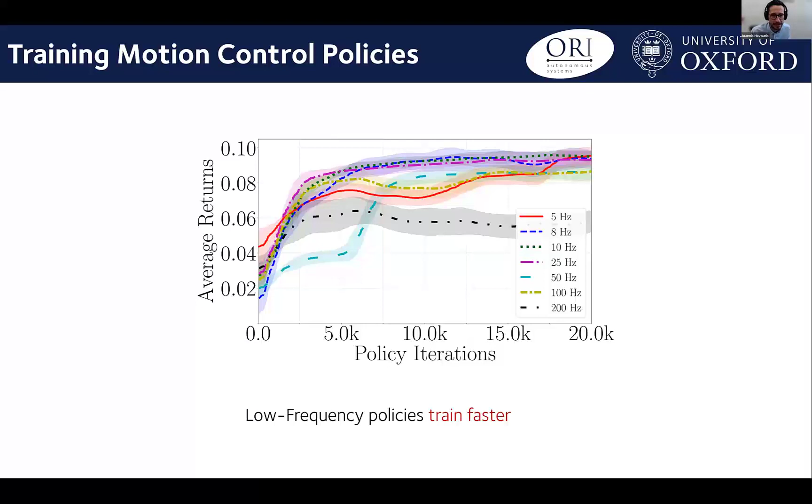We've also observed that the difference is qualitatively very pronounced: in the low frequency locomotion policies, you have very pronounced foot swing and stance durations compared to the higher frequency policies that, intuitively, we'd think would be better suited for these tasks.

To give you an idea of how this works on the actual robots, here's a couple of examples at different control frequencies in the lab. And you can see that with the 5 Hertz, it takes a little getting used to for the user to command the robot around, because it does not follow your commands that accurately anymore.

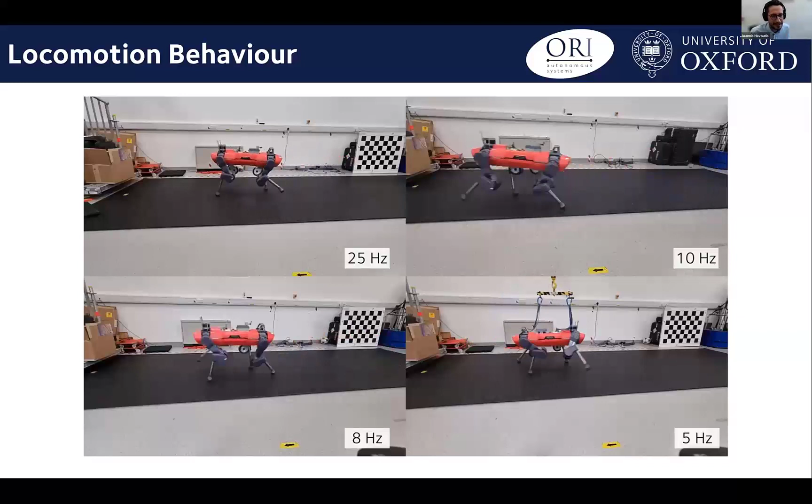But we posit that the sweet spot for such a robot would be somewhere around 10 to 25 Hertz, something like that. All these examples here are run with a 20 Hertz controller. We can be very reactive, very robust. We can deal with very slippery terrain. We can do high-speed locomotion.

So this is in the bottom left. We do 1.5 meters per second locomotion with the ANYmal C. We can do steps and work outside and so on.

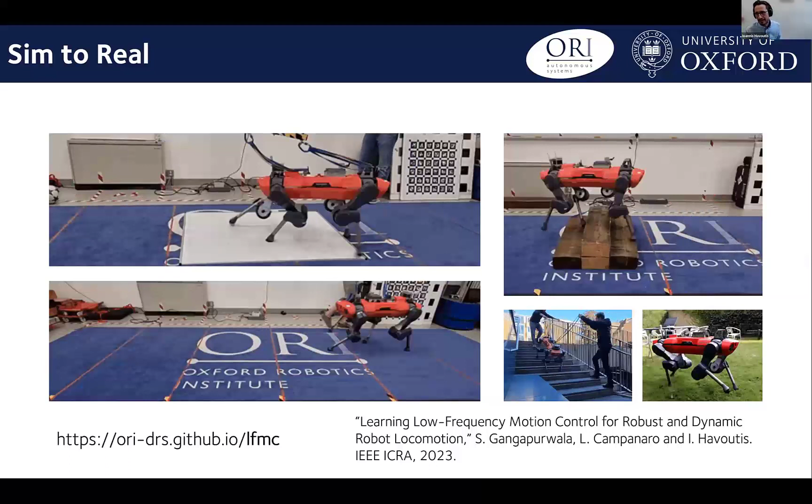This is preliminary work. We've put quite a bit of effort into making this open and accessible. So if you want to have a go and test it out, you can go to the project website and check it out. It's as simple as clone, install, and run it. You can see for yourself how this behaves with different robots and different control frequencies, and how the intricacies of training between different control frequencies work.

I won't spend that much time on what's next. I'll just say that we've been working a lot into transferring these approaches to loco-manipulation and whole body control. We've been working towards generating a benchmark for industrial tasks.

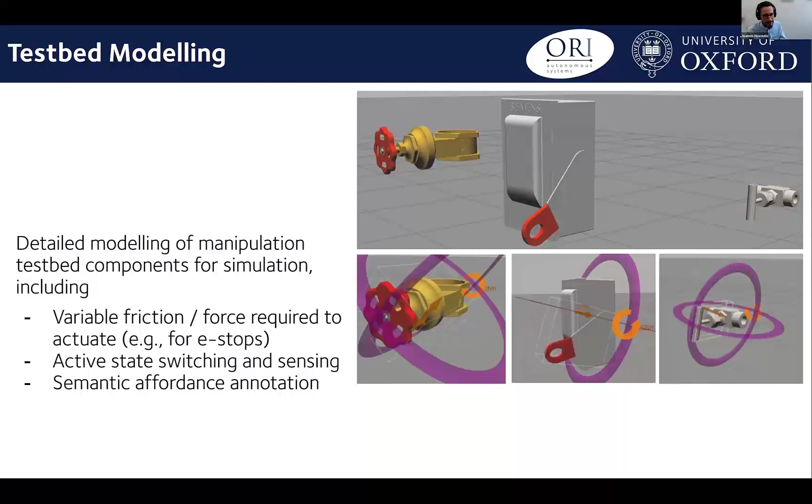We've been looking at how this can be accurately modeled, and we're also thinking of open sourcing that benchmark to the public, so we can have ways of evaluating different approaches. And in future work, we're looking at more learning, and we're looking at world models and semantic segmentation, with a view towards mobile manipulation.

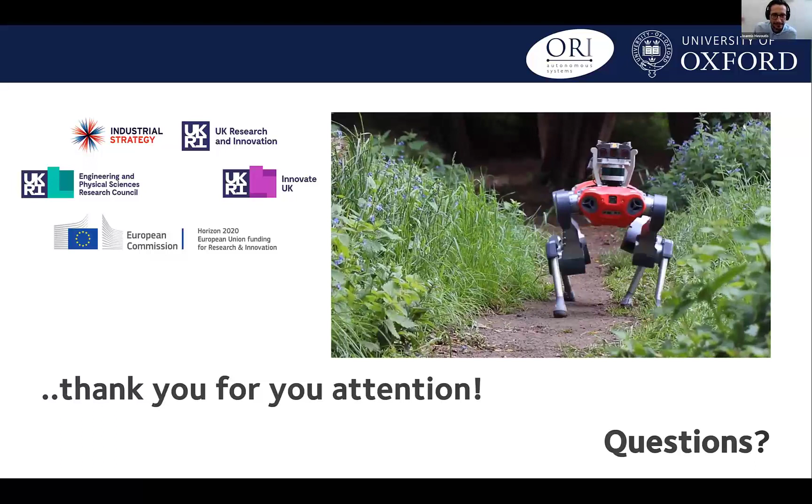So Hae-Won, you mentioned that in order to avoid the local minima, the parameter rho is quite important. Could you give us some intuition about how this is related to, for example, the ground stiffness, and how the value of rho is going to affect the simulation fidelity once you transfer to hardware?

Okay, so I think it's too early to say something definitive because we have not published the paper and this is a very preliminary result yet. We are trying to write a paper out of this, but this is actually not yet validated data. But the rho is not related to soft contact or anything.

It's just a smooth version of the linear complementarity constraint. So this is something like the interior point method for solving the quadratic programming. In interior point method, when you solve the quadratic programming, you're actually relaxing the inequality constraint, so it's a very similar technique. The only difference is we do not actually tighten rho to zero, because we couldn't find a good way of scheduling rho to zero yet.